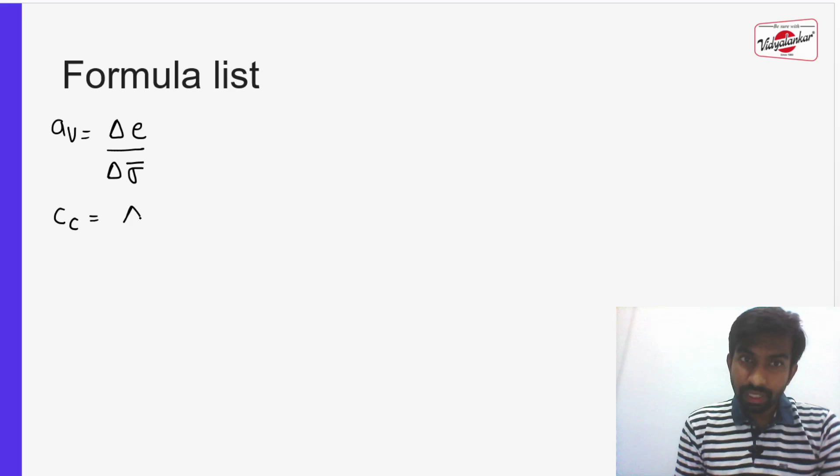So here you have to take the logarithmic part for this denominator, so that the line you draw after plotting the void ratio versus effective stress, that curve you will get in a linear form by just taking this term in terms of logarithmic.

Another coefficient is called the coefficient of recompression. The formula will be the same as the compression index only. Just the difference is that the compression index will be used when your soil is a normally consolidated soil, and the recompression index will be used when your soil is over consolidated soil.

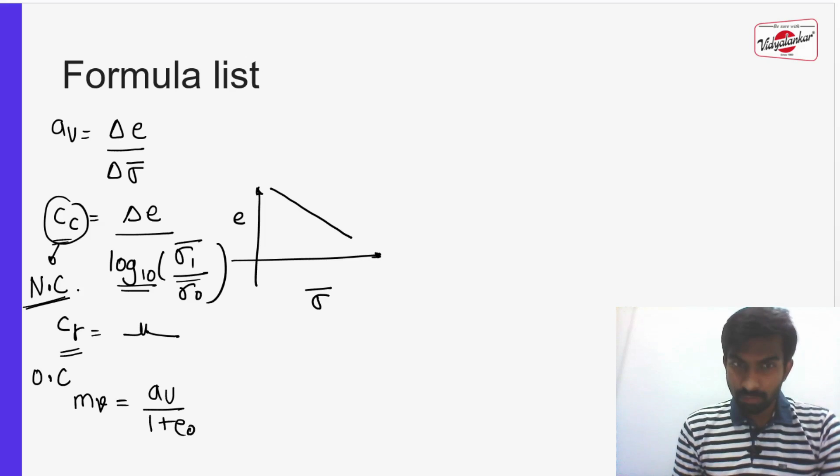Further, you must also know one more coefficient, that is the coefficient of volume compressibility, which is denoted by mv and which is given as av upon 1 plus e naught. av we have already seen, that is the coefficient of compressibility. And one more coefficient that you can remember is the coefficient of consolidation Cv.

That Cv is given as k divided by mv into gamma w. So k is the coefficient of permeability, mv is the volume compressibility, and gamma w is the unit weight of water. So these coefficients you must know at the time of solving the numerical. That is the first task, that 5 coefficients you must know.

The second task, you must know the time factor. The time factor Tv is equal to Cv into t by d square. So the time factor is given in terms of the coefficient of consolidation, the time required for the settlement, and d stands for the drainage path. It may be either one way or two way, that we'll see in the numericals.

The third part, you must know how to calculate the degree of consolidation. That is the fraction of the expulsion of water which is taking place between the start of the consolidation and the end of the consolidation. Generally there are 3-4 formulas, but most probably the used formula will be small delta H by capital delta H. Small delta H is nothing but the settlement at any time t, and capital delta H is nothing but the ultimate settlement.

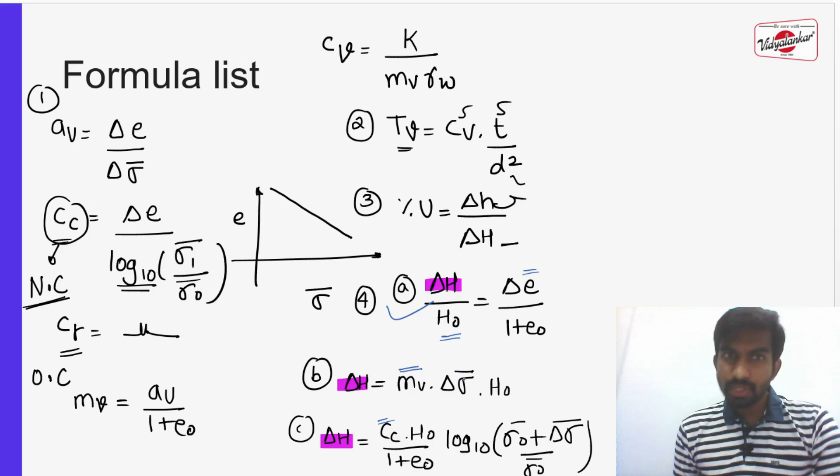So if you have to find out the ultimate settlement, you can use either this formula, that is with respect to the height of the clay layer and void ratio. Secondly, if you know the volume compressibility, then you can use this one, and if you know the compression index, then you can go with this one. So using this formula list, we will start with the numericals one by one.

So the first numerical, in 2020 in the morning slot they asked: a fill of 2 meter sand, whose unit weight is given as 20 kN/m³, is placed over a clay layer to accelerate the consolidation. The coefficient of consolidation is given as a CV value, and the volume compressibility is also given, and they have asked us to find out the settlement of the clay layer after 10 years. So they have not asked for the ultimate settlement.

So first we must know how to find out the settlement. With the given data, we'll first find out the ultimate settlement. Since MV is given, the ultimate settlement delta H is equal to MV into H naught into change in effective stress. MV is given as 2.2 into 10 power minus 4, into H naught, the thickness of the clay layer, which is 10 meter, and the change in effective stress.

Whatever fill we are adding will be the change in stress. That is given as a 2 meter fill with unit weight 20, so it will be 2 into 20. This gives the settlement in meters, coming to 0.088 meter, which is equivalent to 88 mm. So this is the ultimate settlement, meaning the settlement value after full consolidation. But they have asked to find out the settlement after 10 years.

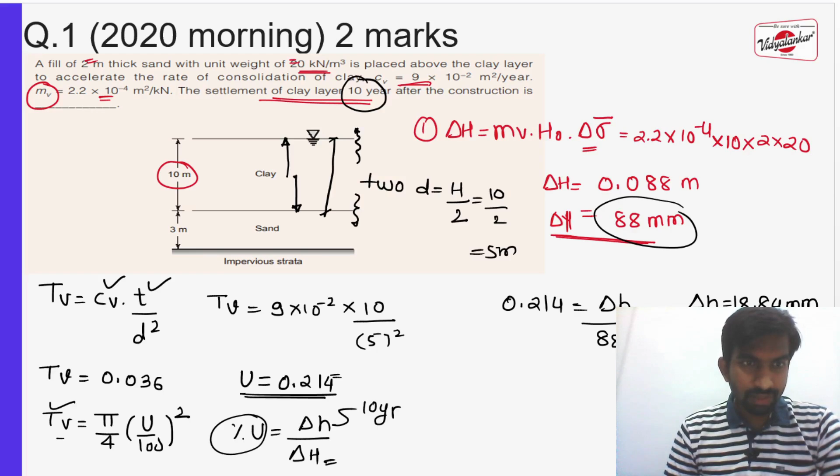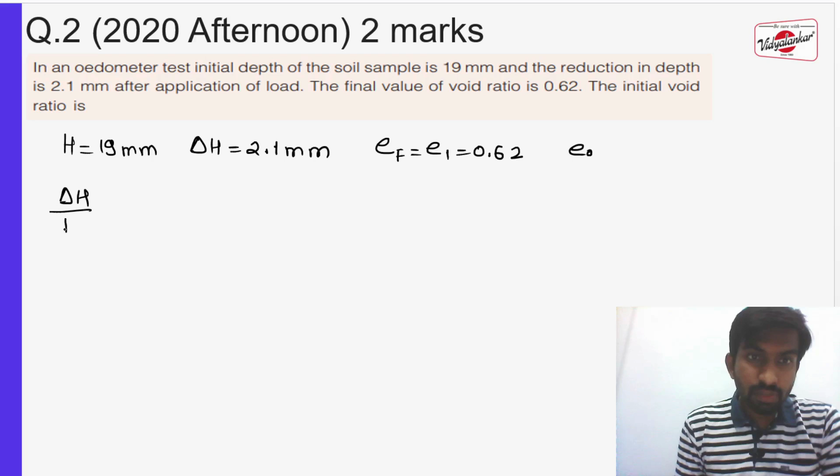The final void ratio is 0.62. So I am taking the final void ratio as EF, or you can say E1 also, that is 0.62, and they have asked us to calculate the initial void ratio, that is E0. So using two formulas here you can find it out. As we know, delta H by H naught is equal to change in void ratio upon 1 plus E naught, and another formula we know is delta H upon H naught is equal to Cc upon 1 plus E naught log to the base 10 of initial stress plus change in stress upon initial stress.

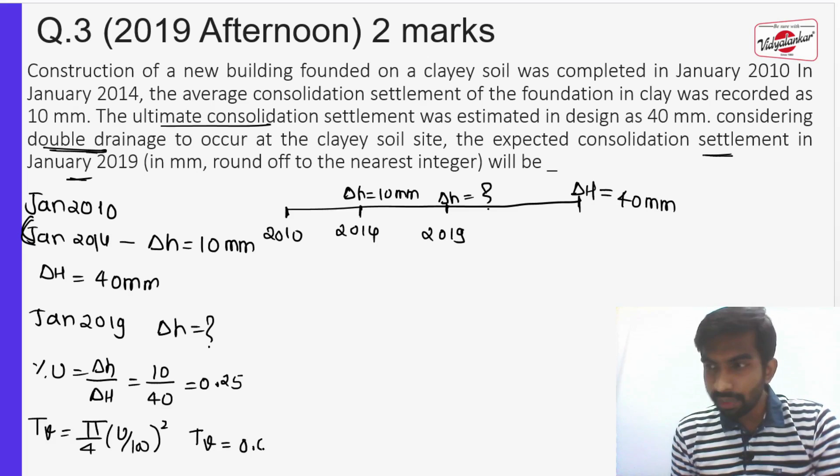Coming to be 0.25, and for that 0.25 you'll find out the time factor, that is Tv is equal to pi by 4 into (U by 100) squared. So if you put the percentage U value here and find the time factor, that time factor is coming to be near around 0.04908.

So as we know that TV is equals to CV into T by D square.

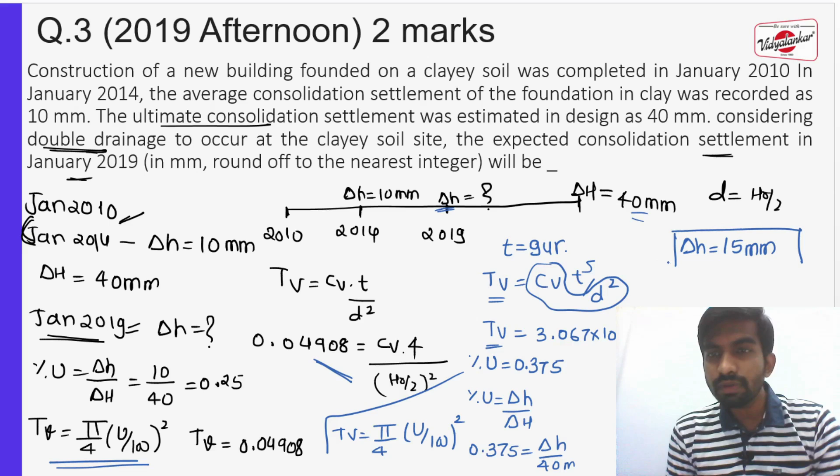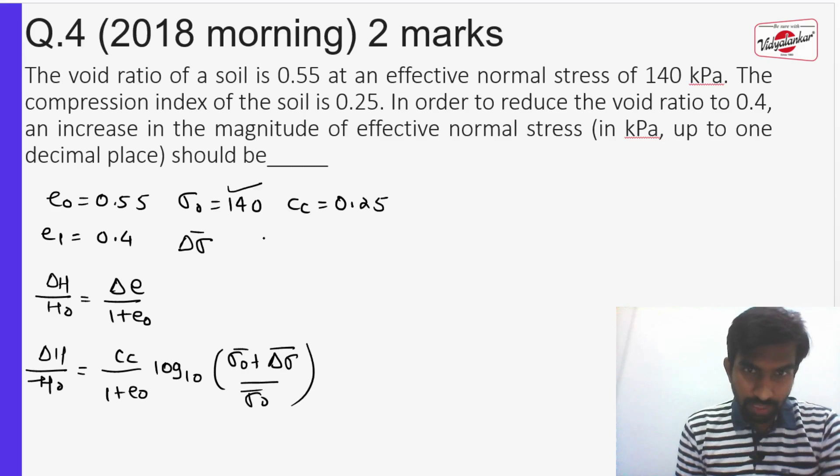If I equate these two, my equation will become change in void ratio upon 1 plus void ratio is equals to Cc upon 1 plus void ratio log to the base 10 of initial stress plus change in effective stress by initial stress. So these two terms will get cancelled. So change in void ratio, that is E0 minus E1, that is 0.55 minus 0.4.

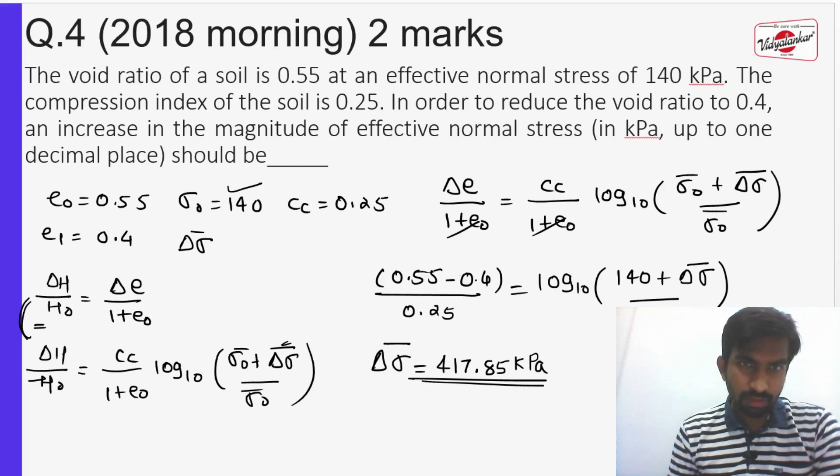I bring Cc here in the denominator, compression index is 0.25, is equals to log to the base 10 of initial stress 140 plus change in effective stress which we have to find out, by initial effective stress 140. So the only unknown will be your change in effective stress. If you solve that, you will get the answer as 417.85 kPa, that is kilonewton per meter square. So this will be your question number 4, which is asked in 2018 for 2 marks.

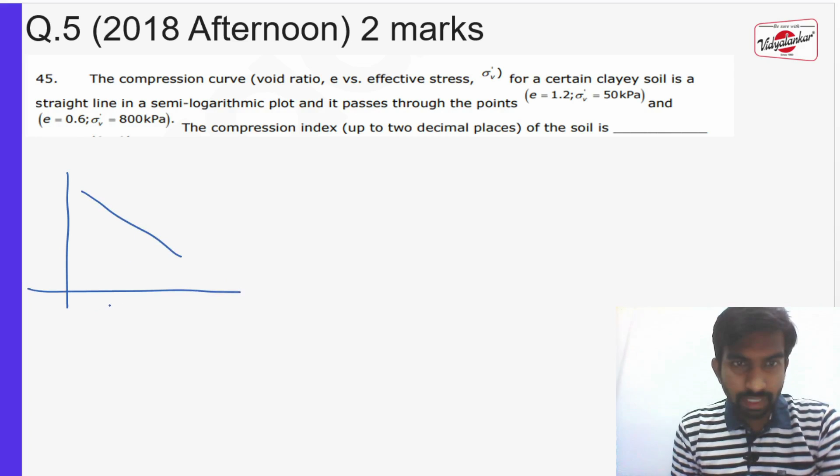The next question, that is question number 5, was given for 2 marks in 2018. In this question, the compression curve is plotted on a semi-logarithmic plot, and it will be curved like this one. If you recall the terms, that is logarithmic effective stress versus void ratio, and they have given the initial void ratio as 1.2 and the initial effective stress as 50 kPa, and the final void ratio as 0.6 and the final effective stress as 800 kPa.

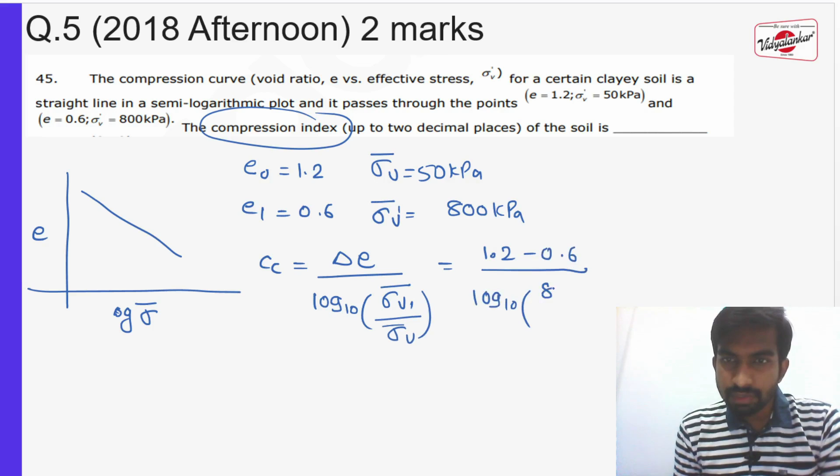So with this data they have asked us to find the compression index. Compression index is nothing but Cc. In the formula list we have written the formula for Cc, that is change in void ratio divided by log to the base 10 of final effective stress by initial effective stress. So the change in void ratio is 1.2 minus 0.6, divided by log to the base 10 of final effective stress 800 divided by initial effective stress 50.

If you solve that, you will get the value as 0.4982. They have asked up to 2 decimals, so you have to round it up to 0.50. That will be your compression index. It is a simple formula that you have to use here. Make sure that you use the virtual calculator properly.

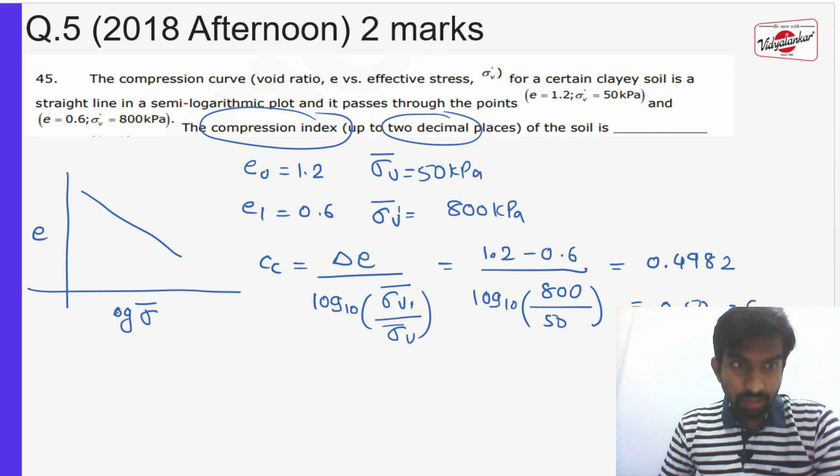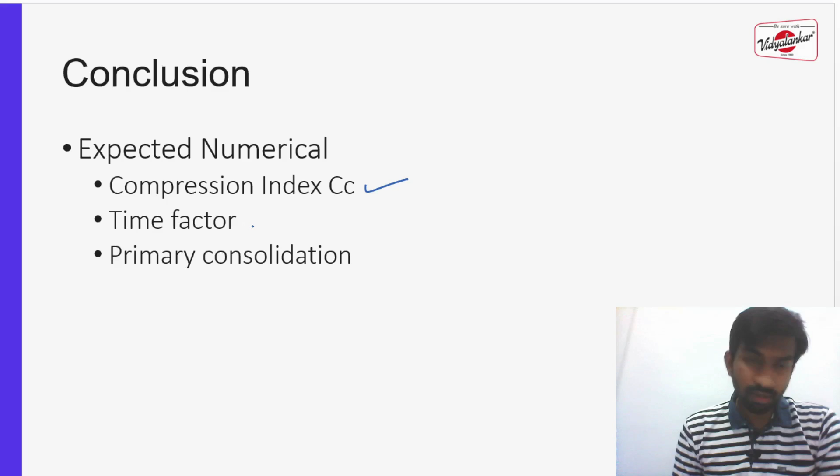So what we can conclude from the consolidation chapter: a numerical is expected this year, that is 2021. Either it will be asked based on the compression index, or the numerical will be asked from the time factor, where you have to find the time duration, or they will ask from primary consolidation, that is finding delta H.